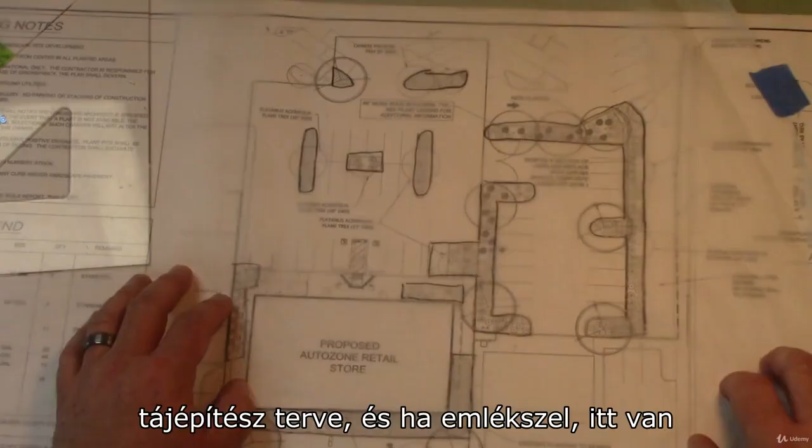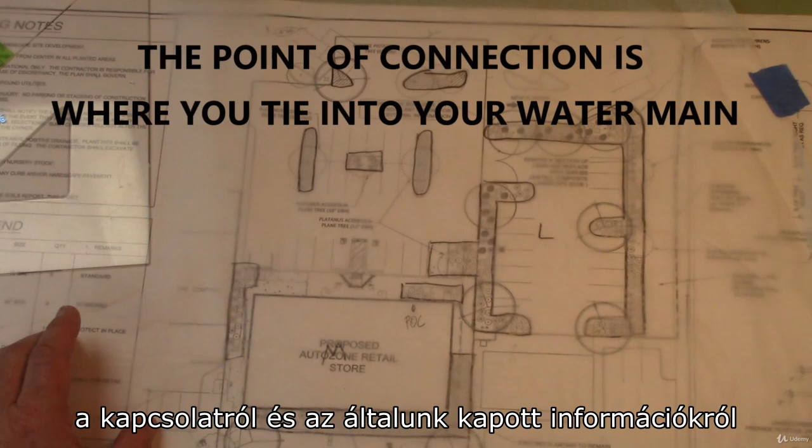All right, we're going to move to our landscape architect's design, and if you remember, here's our beds that were medium usage, and here's our hydrozone out here throughout the parking structure that was low water usage. Okay, so right here we have our point of connection, and the information that we get off of our design is that we have 7 gallons per minute and 40 psi.

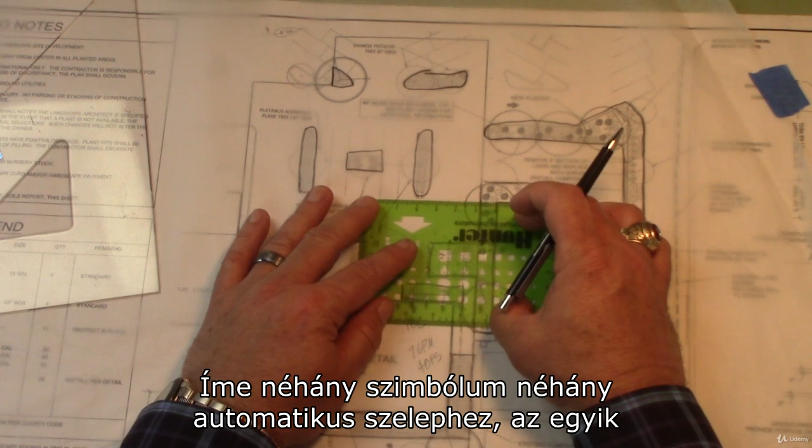So we're going to start here. They have already given us a shut-off valve. We always want a shut-off valve in front of our manifolds. We're going to be central locating our manifold right here. Here's some symbols for some automatic valves. One for our medium system and one for our

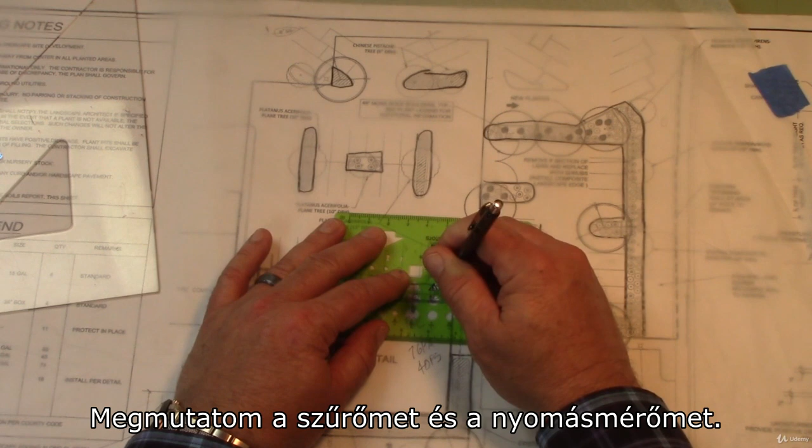low water usage system. I always like to include in my drawing, I'm going to show my filter and pressure reducer in my design. We also know that we have 110 volts over here, so here is our timer. And I'm going to show, so everyone knows, we need our 110 volts.

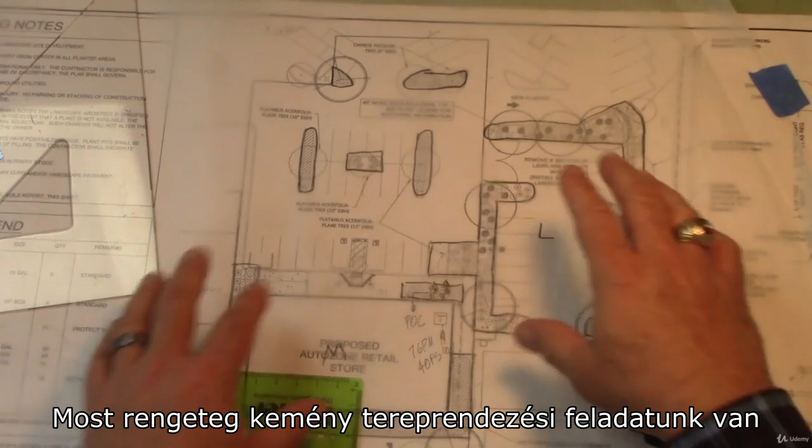Now, we've got a lot of hardscape to deal with in our design, so one of the things we're going to do is make sure that we have sleeves drawn in our design, because we're going to be passing our laterals through these sleeves to go hit our different landscape beds. Now, our particular design is using 3/4 inch PVC, and so what I'll probably recommend, and I'll show in our drawing, is that we're going to be using 2-inch PVC sleeves to pass this through.

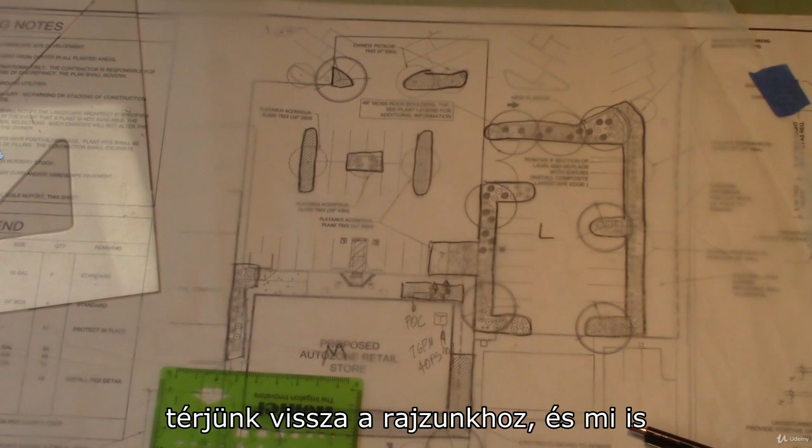If we were going to work on a larger design with multiple laterals, I'd probably be using 3 or 4-inch PVC for our sleeves to get around all of our hardscape. All right, so now we're going to go back to our drawing, and we're going to draw in our PVC laterals, first for our low water usage zone, and we're going to come off of here, and we're going to come across here with our PVC.

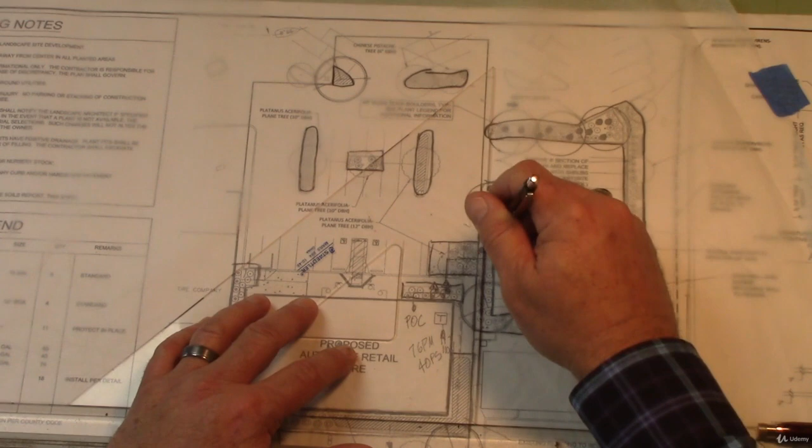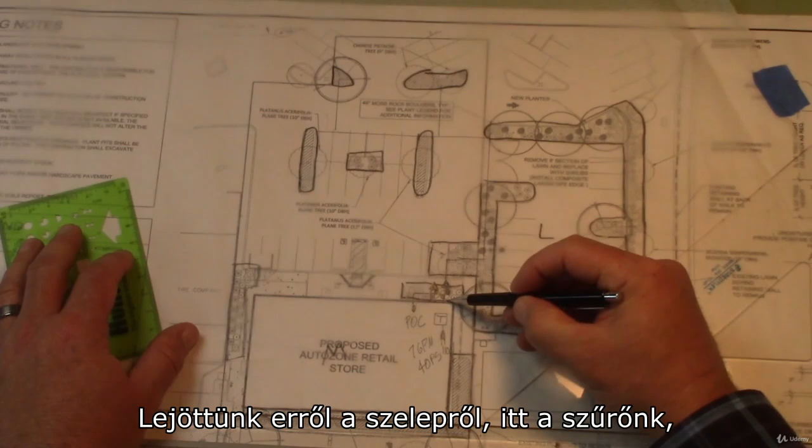Now we're going to work our way across from here, and we're going to pick up these outlying beds off of our PVC. So in our low water usage hydrozone, we've come off this valve. Here's our filter. With PVC, we've hit all the beds. Now let's work on our medium hydrozone.

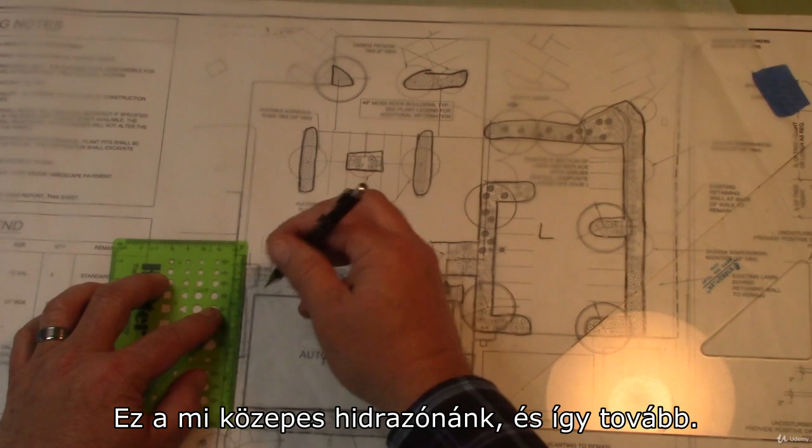We're going to bring our PVC around here. Once again through a sleeve, through our hardscape. And we're going to bring this one around. This is our medium hydrozone. And so we're going to be consuming a lot of water out here in this hedge. So I'm going to bring the PVC around all the way to here and split off with our drip tubing. So let's show that right now.

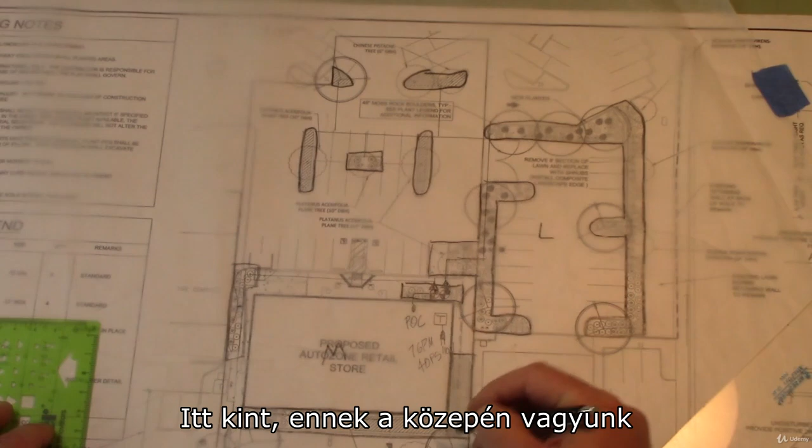We're coming around into this bed. I usually jump in. Now here's my drip tubing. Out here, we're in the middle of this bed here, so I'm going to bring my PVC there. There's my mainline tubing for the first hydrozone. Here's our second hydrozone, and now what I'm going to show is all this drip tubing for the second hydrozone.

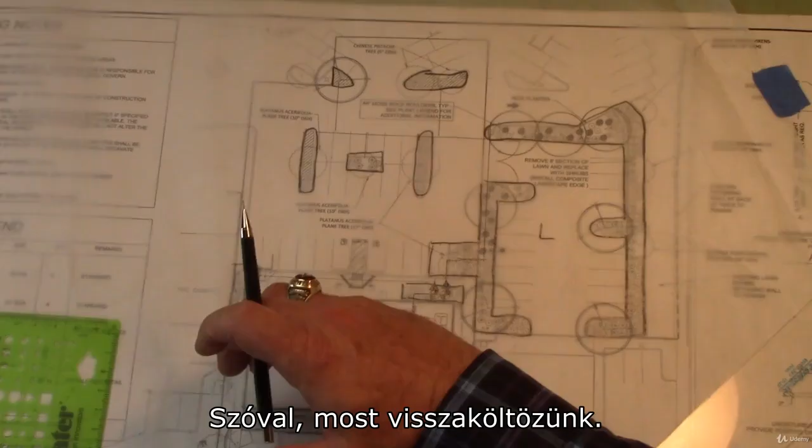They're going to have lots of sleeves in there, and I'm going to also split one of the larger systems in half and bring the PVC all the way around to the halfway point, because we want good hydrodynamics. We want continuous flow, even pressure, and equal volume on these lines. So we move back now. We're going to start out here. Here's my 700 tubing. Don't need a lot.

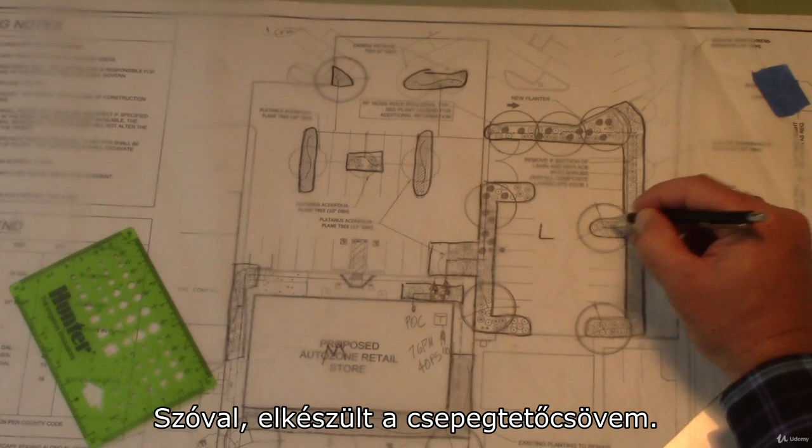We want to make sure that we show this in our design for our contractor or for ourselves. Now, for instance, this one right here is a larger zone, so I'm going to bring my PVC all the way around and split this particular bed in half. So I've got my drip tubing coming around. You'll notice that none of our plants are very far away. Our 1/4-inch tubing, we don't ever want to get it more than 3 or 4 feet away from this mainline tubing. And then here we'll pick this up for this half of the bed.

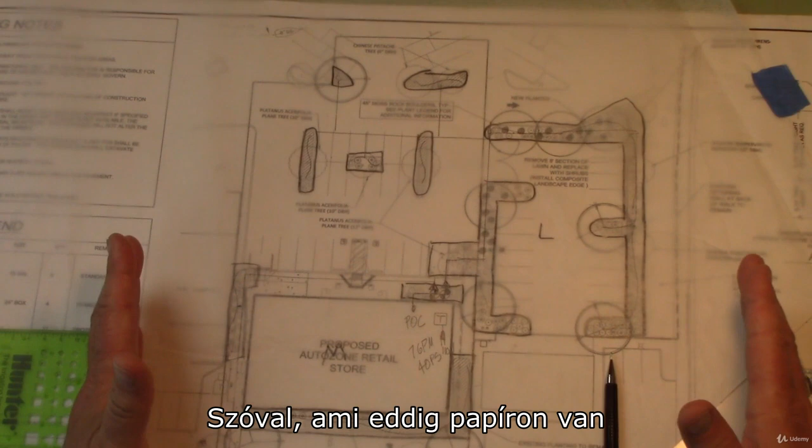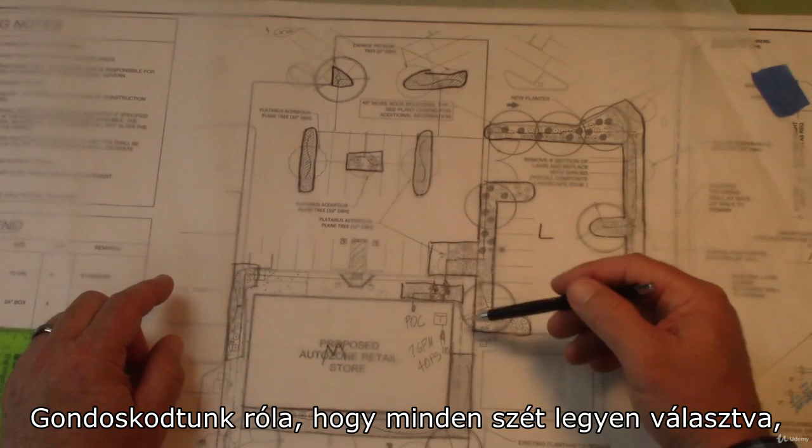So what we've got on paper so far is our point of connection, our timer, our automatic valves, our filters and pressure reducers. We show our PVC mainline laterals going out to our different beds, and from there we show our tubing coming off for our drip system everywhere. We've made sure that we've kept everything split into medium and low hydrozones.

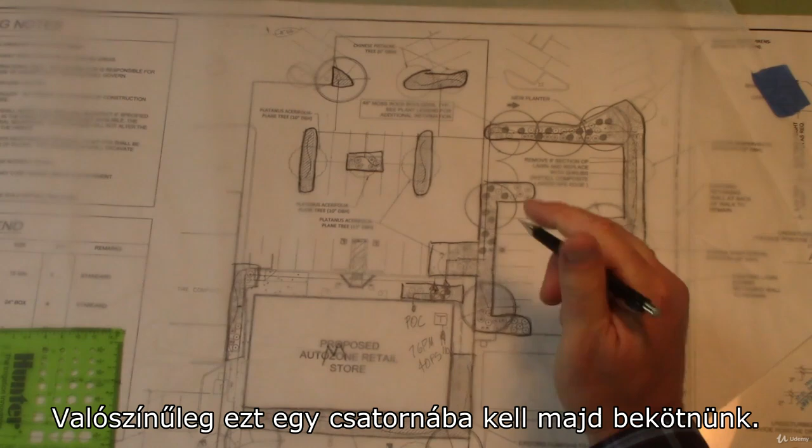Let's talk a little bit about the timer. We need 110 volts. If this is a residential design, we'll probably just use a pigtail and plug it into an outlet. This particular design is a commercial one. We'll probably have to put our 110 and our signal wire going out to our valves in conduit. Signal wire, residential, we typically just run it directly to the valves. Commercial, we'll probably put that in a little bit of conduit.

All right, so now that we've got our design on paper, we can start thinking about doing a parts takeoff. We want to make sure that we've got all of our beds included. We want to make sure we've got all of our major components in, and we have to be thinking about whether this is residential or commercial, and any codes that we might have to deal with for the electrical and the signal wire, or any backflow preventers.

And our next lesson will be moving on to actually doing a parts takeoff, so we can start building our budget. Whether you're a contractor or a homeowner, we need to know how much all these parts are going to be so we can set our budget.